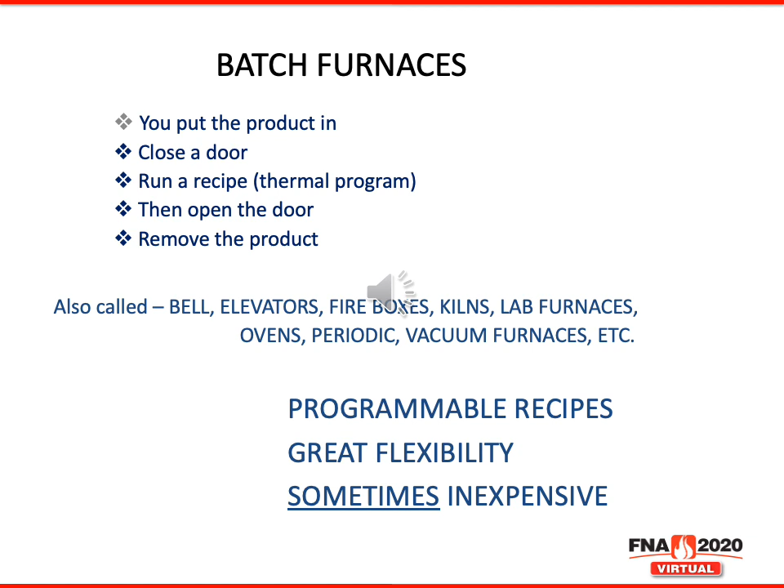On the other hand, continuous furnaces are a bit different. You continually load the product into the furnace. It usually goes on a belt, or sometimes a pusher. It goes into a tunnel and persistently comes out the other end. And when I say persistently, that means if you're not there, it's still going to come out the other end. They have a number of different names, conveyors, belts, lehrs - it all depends upon the industry involved. Even things like glass tanks and steel furnaces, you put product in, it melts, and it comes out as liquid.

They have programmable recipes, but limited flexibility, and sometimes they're relatively expensive. But within range, you can actually have some flexibility in continuous furnaces, just not as large a range as you would have running a batch furnace.

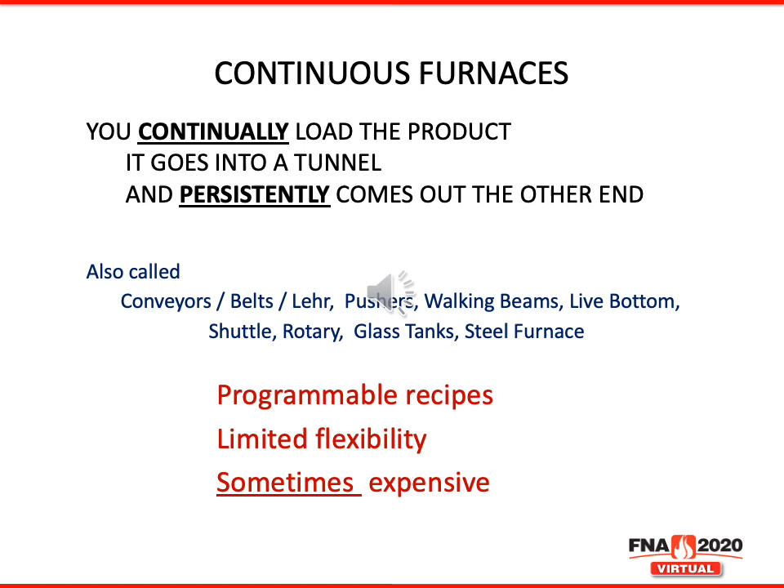So the question really arises, when does it make sense to go to a continuous furnace? Both can be designed for various atmospheres like hydrogen, nitrogen, air, argon, forming gas, vacuum, and mixtures. Batch furnaces are very good for long thermal cycles. Like I said, they have high flexibility in that thermal cycle, not necessarily in the atmospheres, although sometimes they can.

Continuous furnaces are best for stable, well-designed, understood processes. They have high productivity or high volume, and they're really good for repeatable thermal cycles. When you run a batch furnace, you're not always 100% sure it followed the same recipe each time.

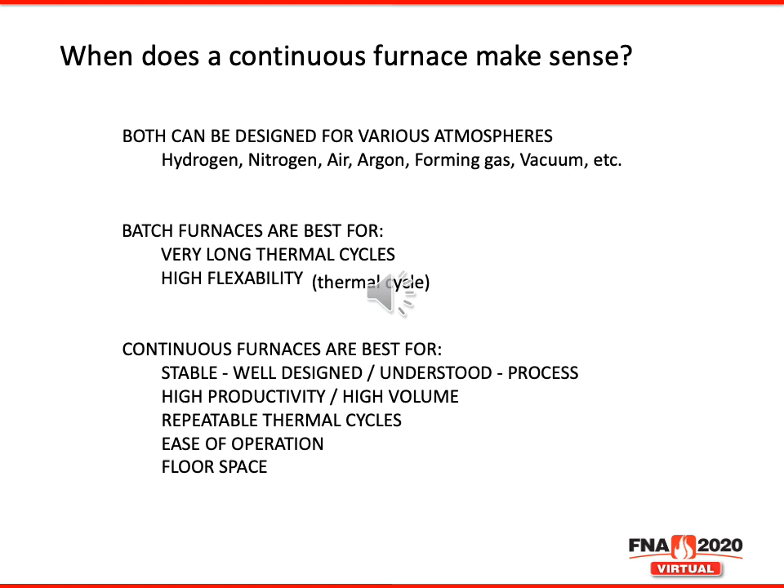Continuous furnaces have ease of operation because they're running and you just put product in there. And there are times when you have high volumes that floor space is really less when using a continuous furnace.

So the next question is, what do you need to know before purchasing a continuous furnace? Obviously the thermal profile or the process window, and maybe both. You need to know peak temperature, the hold times, the ramp rates up and down, intermediate hold times, and time over intermediate temperature. The atmosphere is important because it makes a difference as to how the furnace is designed.

Air, hydrogen, nitrogen, mixtures of hydrogen and nitrogen. In some cases, it's important to know the dew point in the furnace and even the oxygen levels, especially if you're running nitrogen or hydrogen.

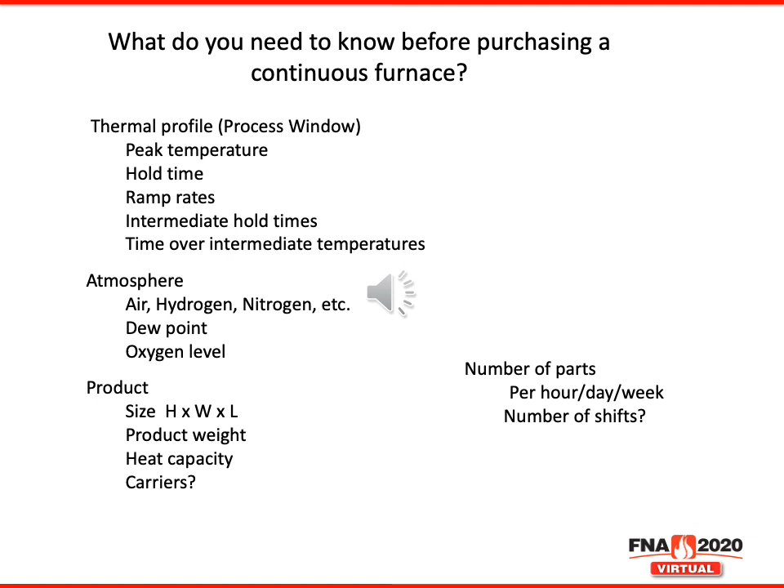You need to know the product size - the height, the width, and the length - the weight, the heat capacity, or is it even put in carriers of some sort. It's also important to know the throughput you need in that furnace - a number of parts per hour, per day, per week, or how many shifts it's on.

So let's focus on continuous furnaces. There are a number of subgroups in continuous furnaces - things like walking beams, pushers, and belt furnaces. Even within that group, it's important to understand that there are differences in furnaces designed to run in air, explosive gas, or even non-explosive gas. Those are very critical things to know.

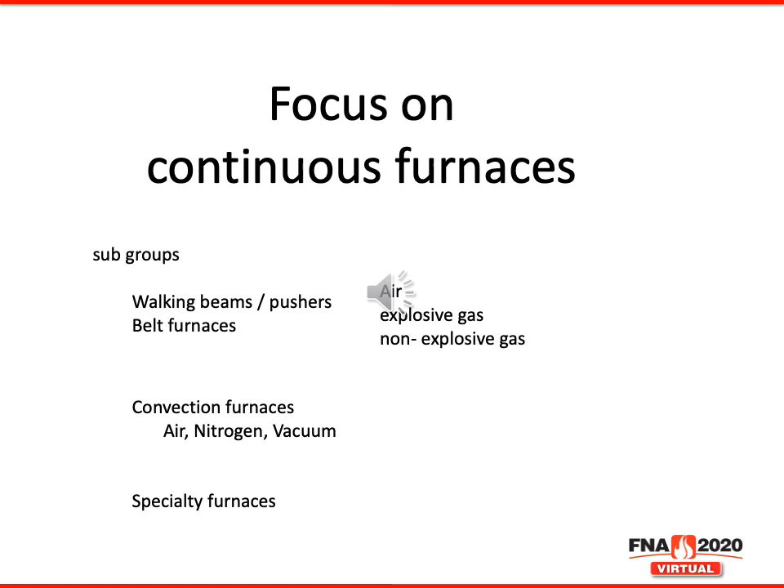In convection furnaces, it can be air, nitrogen, even vacuum. In vacuum, we'll talk a bit more about that later. And then obviously there are the specialty furnaces for very, very special processes.

Okay, we're going to talk about the individual types of furnaces now. We're going to start with the big boys - those are the walking beam furnaces. They have very high throughput, high weight can go through those, very high temperatures. They can be hydrogen and nitrogen mostly. Once in a while you see a walking beam in air, but those are the big boys of continuous furnaces.

There are also pushers, which run a little lower in temperature, around 1800 degrees C, and the weight limit is slightly less. Walking beam uses a reciprocating beam that lifts and moves product forward. Pushers have a train going through the furnace, with the pusher pushing pallet against pallet. The big problem with pushers is at very high weight they become hard to push, and if the pallets aren't maintained well, you can get a crash where things buckle up, which isn't good. But usually pushers are designed so you don't run into those issues.

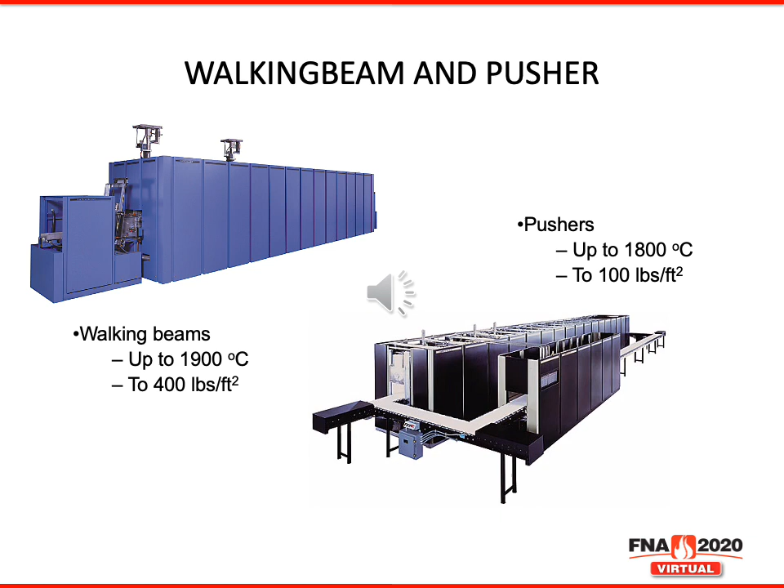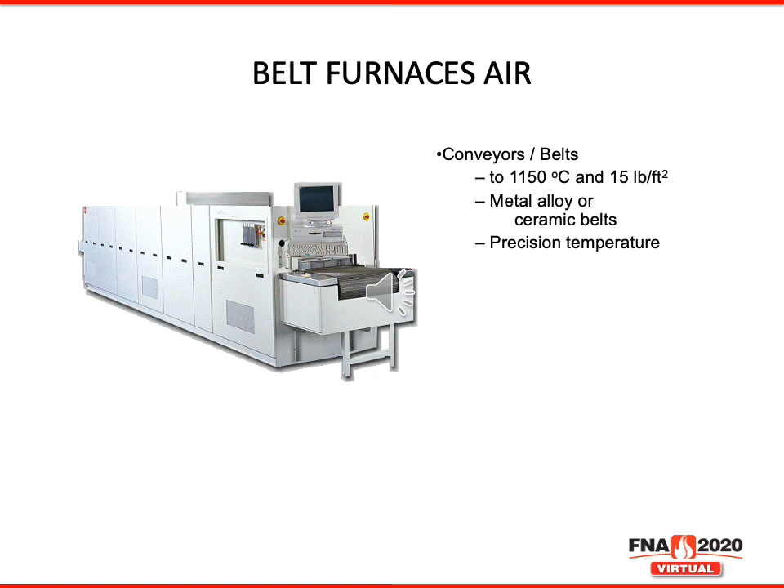The next furnace we'll talk about is the belt furnace, specifically in air. These are called conveyor or belt furnaces. They have a maximum temperature of about 1150 degrees C, and the weight limit, because of the belt, is around 15 pounds per square foot. They use metal alloy or ceramic belts, though most people use metal alloy. Ceramics tend to be a little brittle, but the good thing is they offer precision temperature control. That's the air furnace.

Next are the belt furnaces using non-explosive gas. These differ from the air furnace because they generally have a metal muffle or a seal case to entrap the gases and keep air from getting in. They typically use argon, nitrogen, or less than 4% hydrogen, generally called forming gas, though some people use that term for higher hydrogen levels. They have atmosphere and temperature control along with dew point and O2 level monitoring. They have the same basic weight capacity as the air furnace, 15 pounds per square foot, and the same temperature capability, about 1150 degrees C.

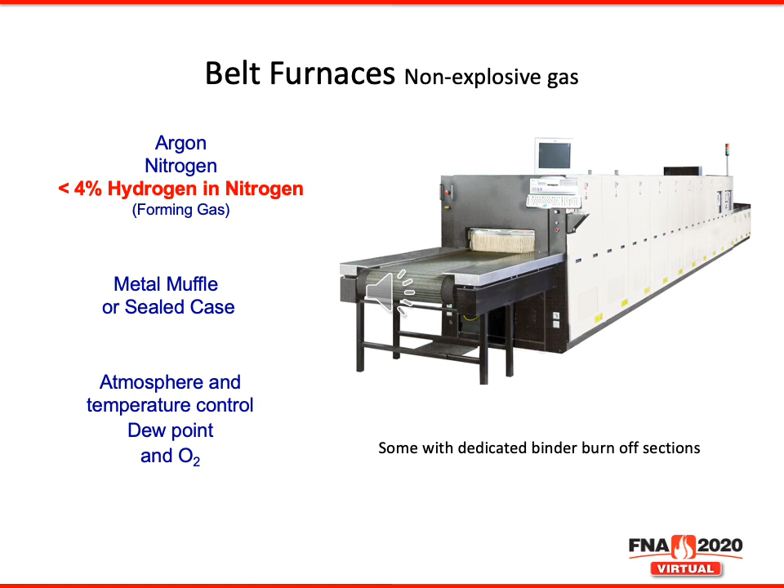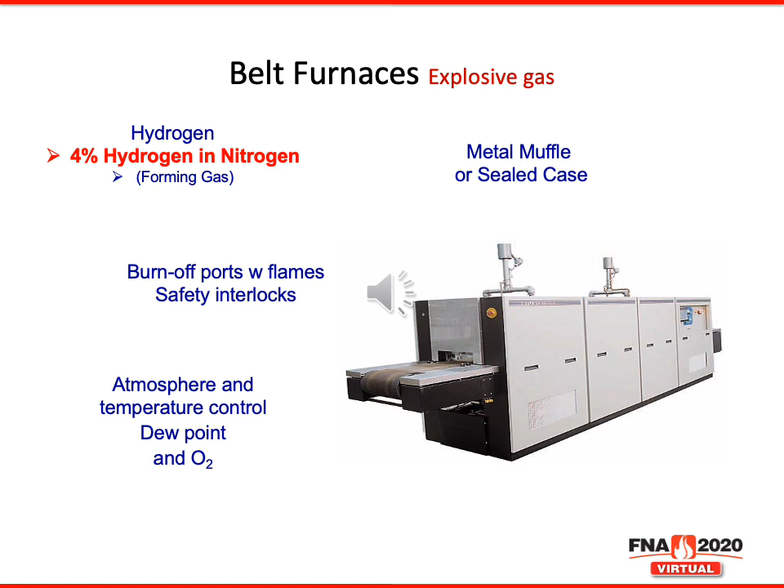The next belt furnace type is explosive gas. These are the fun machines, the ones that do an awful lot of work. Because of the explosive gas, they need special burn-off stacks so we don't have explosions, since hydrogen mixed with air doesn't do very well. They have burn-off ports with flames and safety interlocks so the machine runs safely. This is typically hydrogen greater than 4%. Going back to forming gas, I've had people say they use forming gas only to find they're at 15 or 20% hydrogen, meaning they really need an explosive gas furnace with full safety interlocks. Again, these have metal muffles; sometimes sealed cases are used, but we're not very comfortable with sealed cases here. We much prefer metal muffles for this work. They again have atmosphere and temperature control, dew point, and sometimes O2 control, for when someone needs very low oxygen levels, down to 1 or 2 parts per million. You can achieve that in these furnaces quite easily.

The next type are convection furnaces. They can run with either air or nitrogen, basically heating with hot gas. It's like a convection oven at home, except it has a belt running through it, and it tends to run a bit warmer. They go up to about 400 degrees C as the general peak temperature, though a few run as high as 425. They're used mainly for solder reflow or epoxy curing, which happens around 100 degrees C. They have multiple heating zones, usually with top and bottom heat and an internal cooler. They're really a workhorse for that lower temperature range, and convection works significantly better than radiation when you need precision control at those lower temperatures.

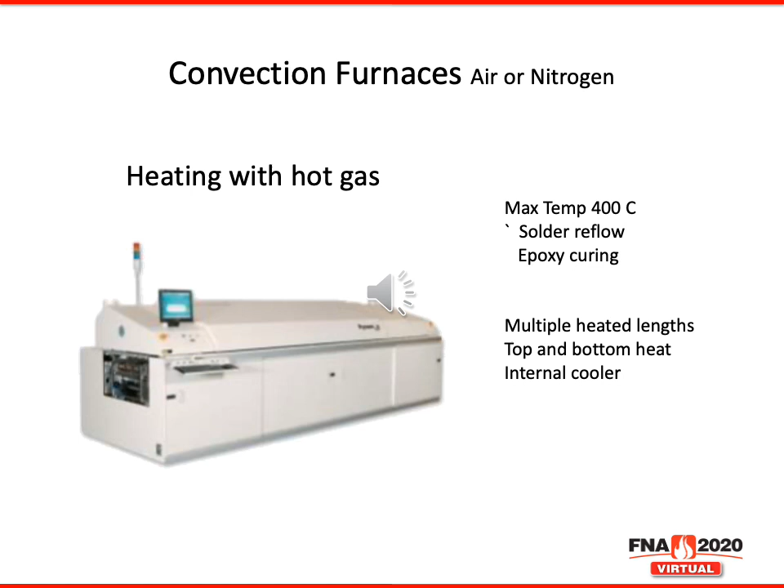This is a typical convection reflow oven. The top one is nitrogen, the bottom one is air. It's easier to explain with animation, but we'll try here. Looking at the top oven, the nitrogen oven, you'll see the entrance has a lip vent exhaust in the curtain area. The curtain isolates the room atmosphere from the nitrogen atmosphere inside. At the exit, you have basically the same setup, a curtain and a lip vent exhaust.

Nitrogen ovens have heating zones and cooling zones, and usually a flux management system. What you want to be able to do is pull any of the flux that may be in the oven's atmosphere, take it out, scrub it out, and then return that clean nitrogen to the oven itself.

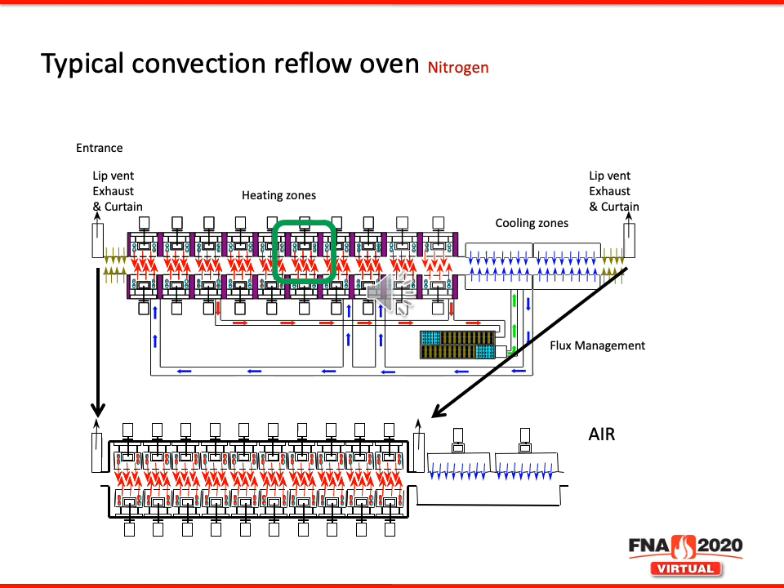On an air oven, you don't care about returning the air to the oven. What you basically do is eliminate the curtain at the front. We put a lip vent, the exhaust right at the front edge, without the curtain. On the exit, we move the lip vent to between the heated zones and the cooler, because we want to stop any of the flux from moving down into the cooler and condensing there. You'll see on the nitrogen oven I have a green square around that area - we're going to talk about what one of those plenums really looks like.

Okay, so this is a typical reflow oven heated zone. The top plenum - there's actually one on the bottom that does exactly the same thing - pushes the heat into it. If this was done with animation, it would be a bit easier to point to the individual items.

Let's start at the top left with the nitrogen inlet. Across the top, you see the blower motor. If we drop down a little bit, you see the blower motor drives this blower wheel, and that's what develops the pressure in the chamber. The blower wheel is like a scroll fan - it kind of looks like something you'd put a chipmunk in and have them run around, but it's a lot faster than that. What happens is that scroll fan spins, it pushes the gas across the heater to heat the gas and develops the pressure in the chamber.

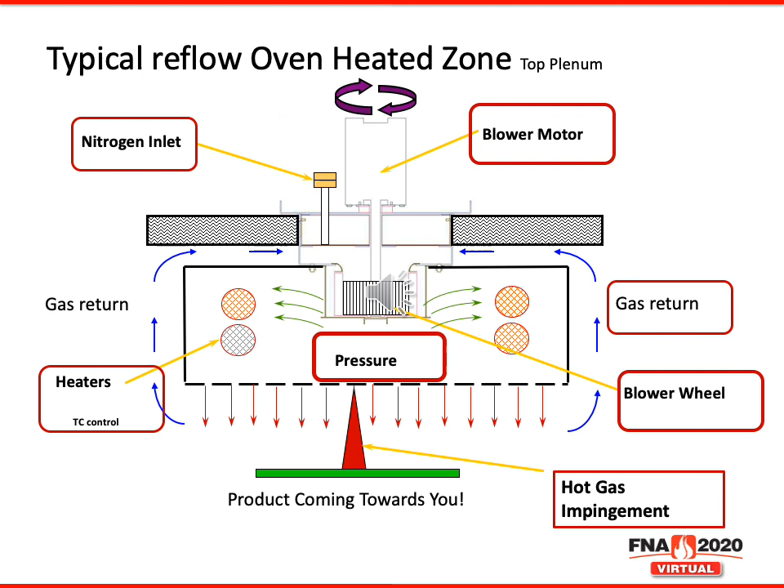What the pressure then does is go through small orifice holes, and it pushes that hot gas impingement down onto the board itself. Then there's a gas return that goes back up the side, so you don't have to reheat the gas each time. This is basically the top plenum from a reflow oven.

I mentioned earlier that we're going to talk about some continuous ovens that actually had vacuum in them. There is a convection oven with inline vacuum. This isn't really brand new - inline vacuum ovens have been around.

When I worked in the automotive industry, we actually used continuous vacuum furnaces to flash aluminum on the insides of the reflectors used in automotive headlighting, although those were very complicated machines and didn't quite reach the kind of temperatures we're talking about here. In that industry, we just wanted to pull a vacuum and then flash aluminum to get it onto the surface.

The reason we're doing inline vacuum on convection ovens is that for some components being put under hood in automotive areas, military, and some medical devices, they want to put more power into those. Part of that is being able to get the heat out of the chip, which means thermal pads have to be without voids. That's really what this is about.

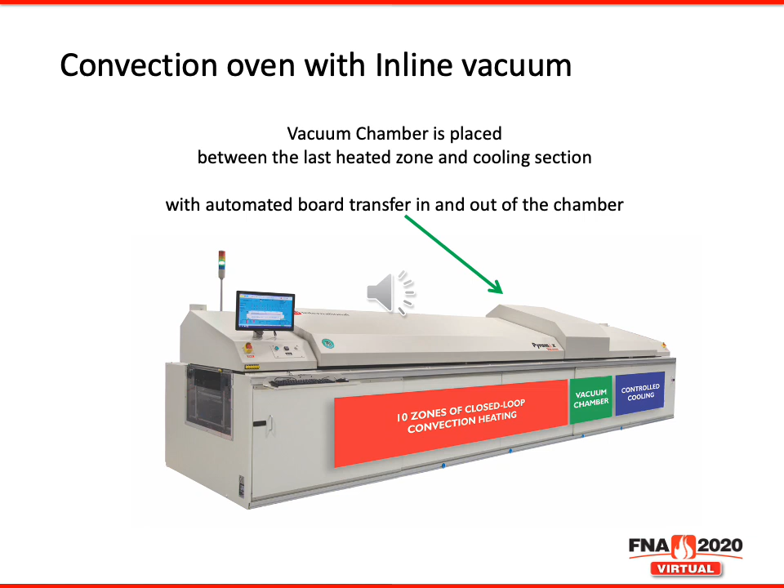Vacuum levels - you can get down to about 1 torr with that. Basically, what they do is take a standard reflow oven - mostly nitrogen - and place a vacuum chamber between the last heated zone and the cooling zone. Then you have an automated transfer in and out. So it does interrupt the process during that cycle, but it seems to be working very, very well.

This is a typical part of the vacuum process that we see. I pulled one of these out just to explain what happens in the vacuum chamber. You basically have a pump down, and the rate at which it pumps down is critical - if you go down too fast, you get splatter of the solder and chips that actually turn over. You go down to the vacuum level, the torr level that we get - this one, I think, was down at about 20 torr.

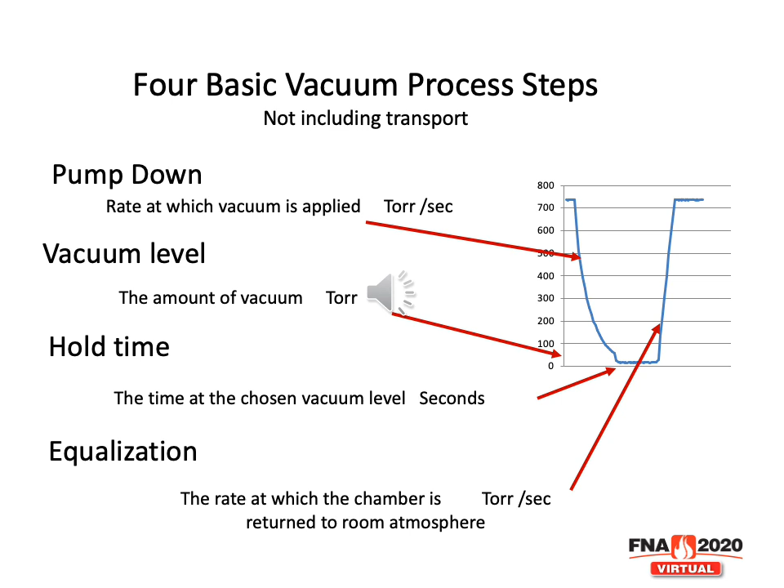Then there's hold time - a number of seconds - and then a refill, the return to room atmosphere. So that's really what goes on. The total time for that in the vacuum chamber might be 30 or 40 seconds at the most.

I mentioned specialty furnaces. There are a number designed for different kinds of applications. There's live bottoms, which look like a flatbed rail car that travels through a hot tunnel. They're basically air, and can handle thousands of pounds. They have very long thermocouples, and I think mainly they're used in the brick industry. There are rotary furnaces, rotating tube furnaces, where products like sand travel through a tube at an angle, and you control the throughput by controlling the angle and rotational speed. Then there's glass tanks and steel furnaces that handle molten materials. I'm not going to cover much more about those, but they are continuous furnaces.

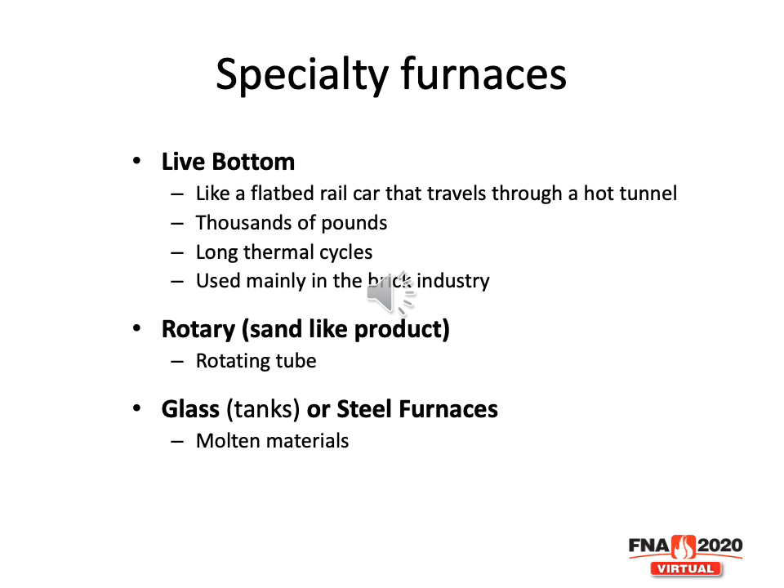Okay, so we'll talk about how we get things hot, heating technology. Basically there are two methods, though a few others exist too, but I'm going to talk about the two major ones. One is gas or flame, the other is electric. I'm not super familiar with flame heating, but I'm very familiar with electric heating. There are people who specialize just in flames, adjusting and controlling them, so I'm going to talk about the electric side.

There's obviously convection heating, like we mentioned before with the reflow ovens. There's things like moly disilicide and silicon carbide rods. There's refractory metal rods, mesh, wire, and ribbon - things like moly and tungsten. And then there's fully enclosed ceramic heaters, called FEC. Most of the stuff we use is the fully enclosed heater because it protects the heater's surface, and they tend to work quite well for us.

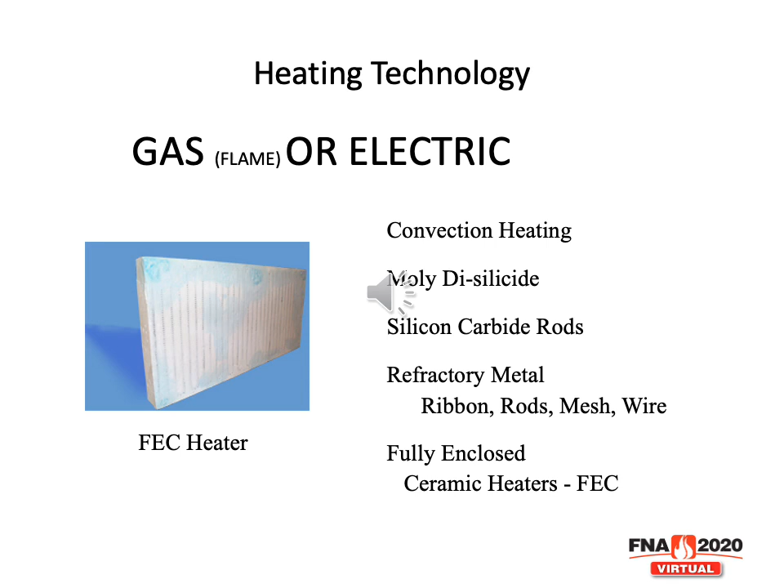Insulation in furnaces can be things like brick, high-performance board, fiber blanket. Some of the things you can use are heat shields, called cold wall - usually moly or tungsten, and even graphite and carbon. The issue is when you get to graphite and carbon, you have to make sure the O2 levels are very low, otherwise they just disintegrate.

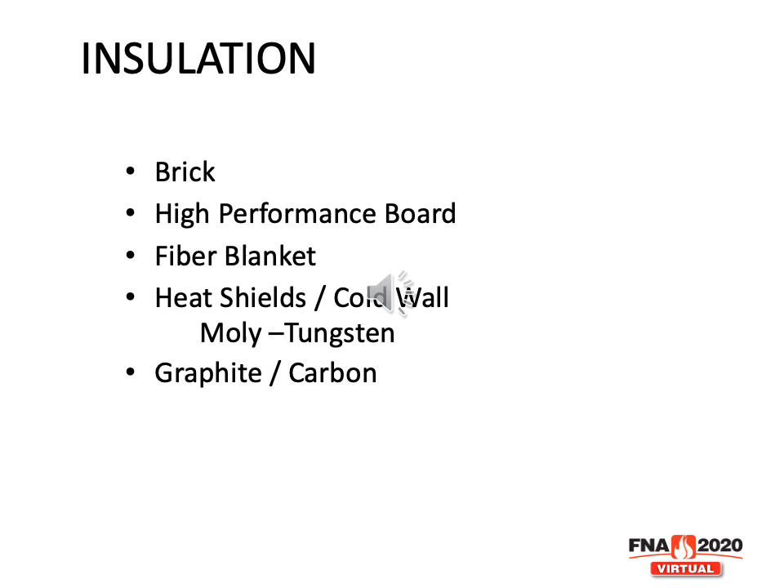There's technology to separate the internal atmosphere of the furnace from the room - things like purge boxes. I didn't quite have the ability to pull a picture of one of those; this COVID thing has limited my ability to pull some pictures. We have things like gas curtains - this is the gas curtain in the belt furnace. Basically the same philosophy applies with convection ovens. On some hydrogen furnaces, you'll actually have flame curtains - we're burning the hydrogen at the end, which helps stop air and oxygen from moving into the furnace. Instead of having stacks and gas curtains at the ends like I showed earlier, these use a flame curtain at the front of the furnace.

The next topic is technology to separate the furnace atmosphere from the room - things like purge boxes, or sometimes called double door airlocks. Unfortunately I wasn't able to get pictures of this because of COVID. Really, calling them airlock boxes isn't quite correct - you might call them atmosphere exchange boxes. They work somewhat like clean room pass-through boxes. We fill a box with hydrogen and nitrogen before opening the internal door to the furnace, so you're not putting air within that furnace. There are gas curtains for separation from outside to inside, and they usually have stacks of some sort within the furnace to help control airflow, like with the Venturi I mentioned earlier - used for binder removal and hydrogen burn-off stacks. Some hydrogen furnaces use flame curtains that act as a barrier to stop oxygen from entering the furnace and hydrogen from getting into the room.

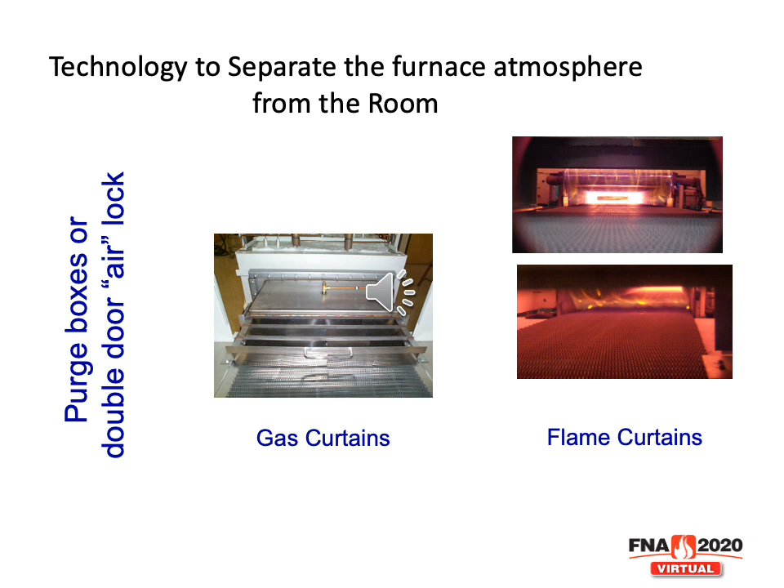You can also design into the furnaces things like heat barriers and shadow walls to help with rapid changes in process temperature. This is basically a heat barrier. You can see it's kind of hard to see in these pictures, but this is a barrier that can drop down to give you a little bit of isolation. It helps you have more rapid changes in process temperature, with less crosstalk between the zones.

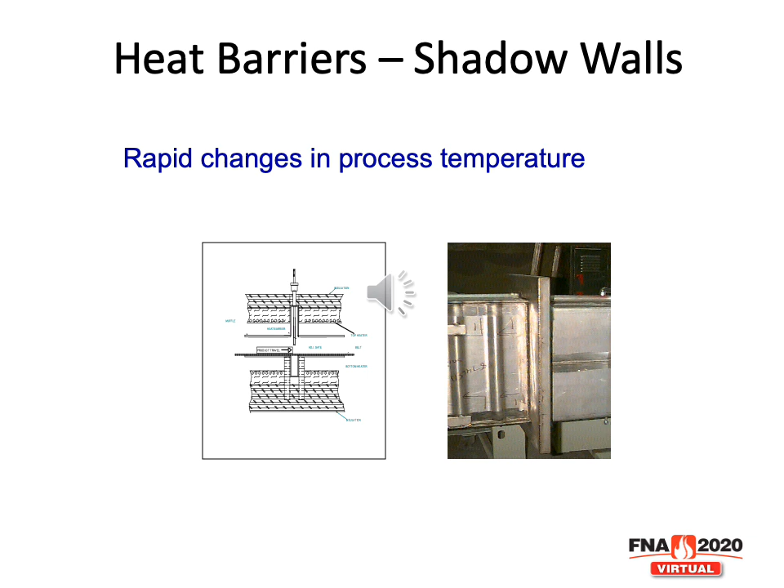Another tool that we have is gas barriers. They allow us to isolate or even exclude gases from certain areas of the oven. They have the ability to get very, very low ppm capability to drive the oxygen level way down, and a very high purity hydrogen atmosphere in some furnaces, and you need the controlled exhaust to make these work.

We have a furnace that actually has nitrogen curtains on the end and hydrogen in the center, and we're able to approach 96% hydrogen in the middle of the furnace. Some processes that's very important for. Others, you're happy enough to get into the 65 or 70 or maybe even 80% hydrogen in the oven. But there are some that require that very, very high purity hydrogen, again up into the 96% area.

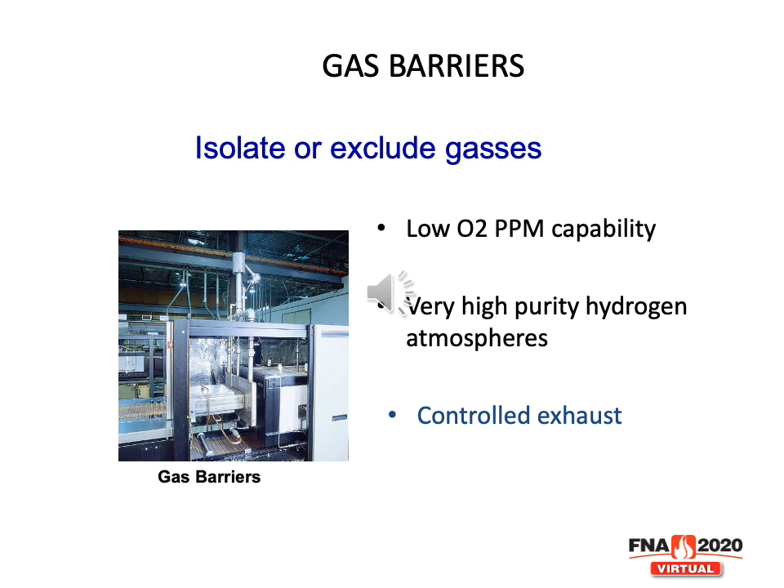We use a principle sometimes called Venturi, or Venturi exhaust, to help remove gas from the furnace and control the direction gas goes in the furnace. They sometimes have removable stacks. Sometimes we actually put sparges in, which add gas that can be heated or non-heated, and this is to help control the O2 levels in the furnace.

And sometimes you need to pull a binder out, for example in an area you don't want to contaminate the furnace, so you put one of these in. We actually had a furnace at one point in time, easy for us to put another one together, that was used for copper end termination, where we needed to run maybe 10 or 15 ppm of oxygen for the binder burnout section. We used a lot of sparges and added some gas in there to keep that mixed up. Then, following just after that, we did it with gas barriers, but we were able to run down to less than 2 parts per million during the sintering section when we actually raised the temperature. That was a very unique machine. It was a lot of fun to run.

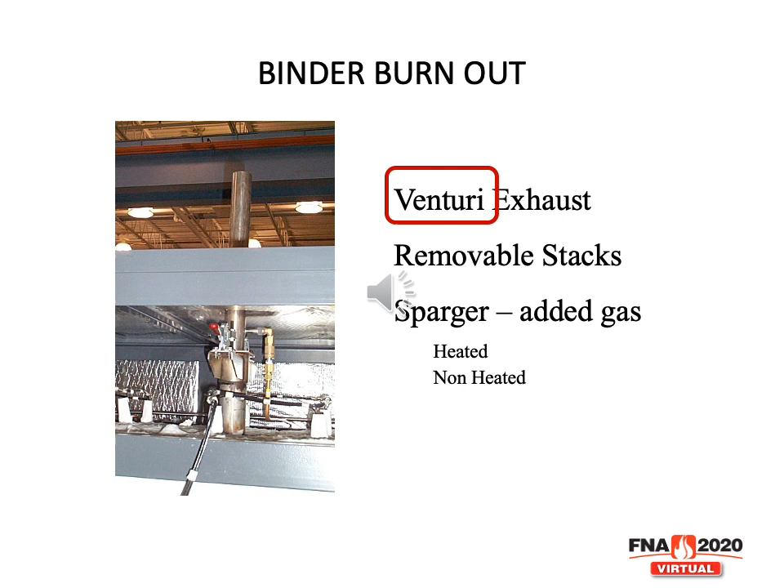We have a quick discussion on the Venturi operating principle. I think most people are aware of that. You put high velocity gas through a very small orifice, and it entraps and pulls a lot of gas along with it. It was developed by a guy named Giovanni Venturi, and that's where you get about 8 to 15 times the input. So if you put 2 liters per minute through the Venturi tube, you can pull anywhere from 8 to 15 times the amount of gas through that tube.

And we use that fairly often to control which direction we want gas to flow, because generally what you want to do is make sure you have the cleanest gas at the highest temperature within the furnace, because that's where you're doing the major amount of work.

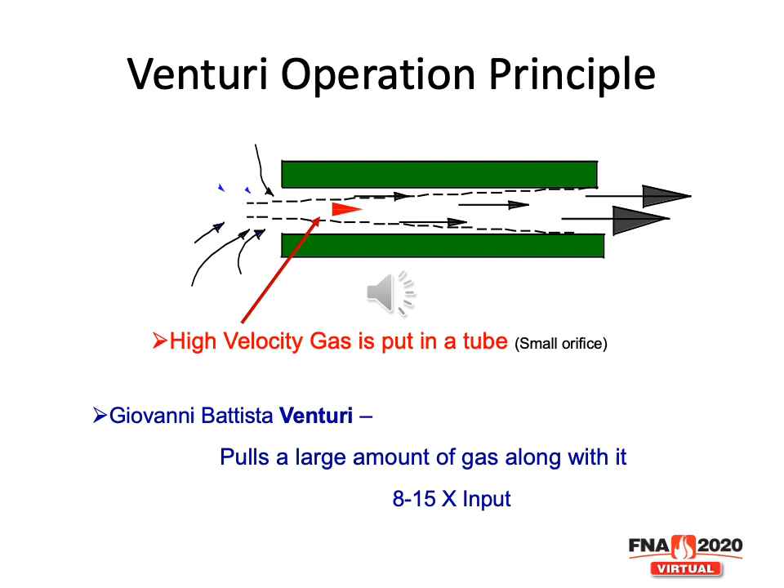In many cases, it means that people can fit the furnace in their building, and still get things that are cool coming out of the end of the furnace.

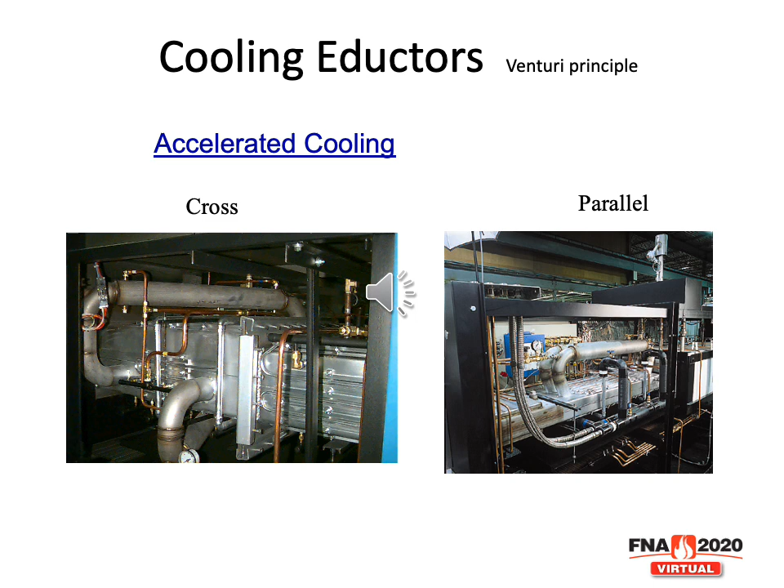Another place we can use the Venturi principle is in cooling eductors, for accelerated cooling. We pass gas through a small orifice inside a tube, and the outside of that tube has a water jacket that cools the gas and returns it to the furnace. We can do this in cross eductors or parallel eductors, both work depending on the particular product and what we're trying to achieve. This accelerated cooling allows us to shorten the cooling section of the furnace, which in turn allows people to fit it in a building they might otherwise not fit it in.

So we go back to the question: when should I get a belt furnace? Now we know what options can be put on it, and there are other options I didn't discuss. It's an economic issue. It's when you have higher volume and a need for process repeatability, and you really need to be able to clearly describe the process so the features we've talked about can be put in the correct places in the furnace. It doesn't do any good if you want a smooth, easy ramp rate and you suddenly put a gas curtain in place - it doesn't always work, unless you want to turn the gas curtain off. But you really need to be able to describe the process so the features can be put in the right place in the furnace.

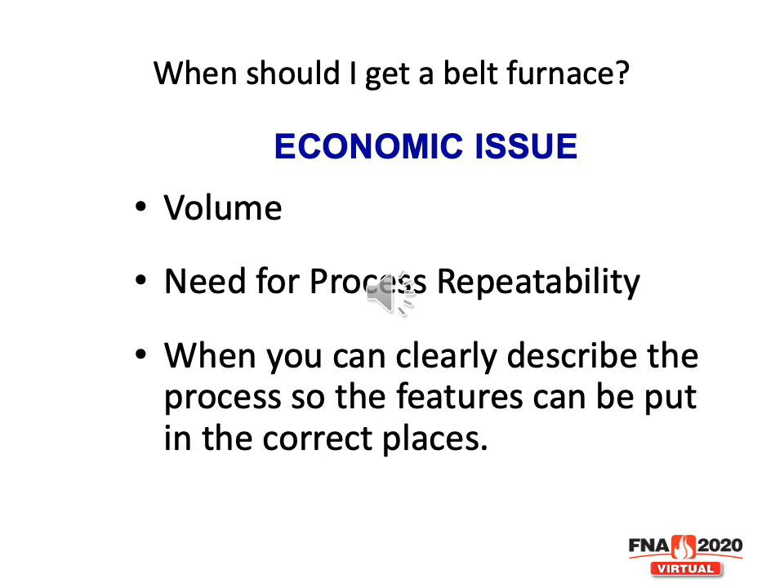One of the questions that comes up on a regular basis when talking about continuous furnaces is: how do you set it up for, or do verification of, thermal profiling? To do that correctly, you really need to measure the temperature of the part as it goes through the process.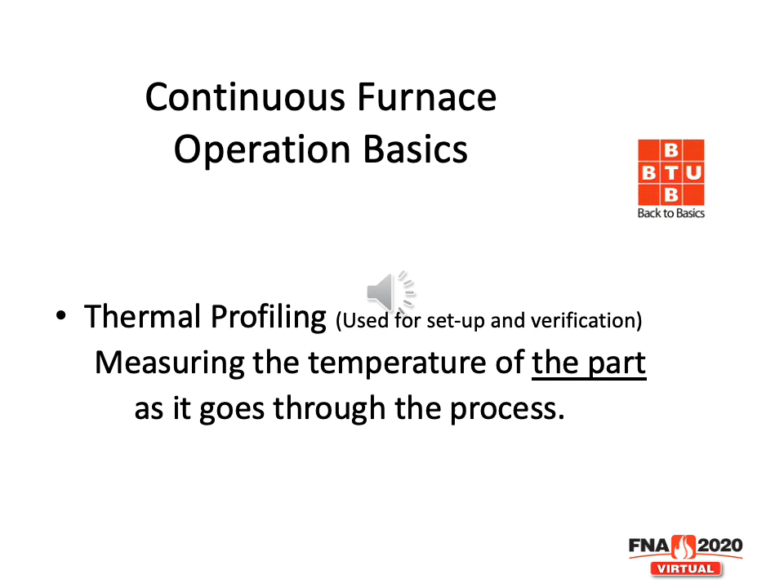So the question really comes down to, how do you get these product profiles? There's low temperature and high temperature profiling, but in both cases they require a temperature sensor and a data acquisition device - really, a thermocouple and a thermal process profiler. So the question becomes, how do you obtain these product profiles? There's a slight difference between low temperature and high temperature profiling, but they both require a temperature sensor and a data acquisition device - that's a thermocouple and a thermal process profiler.

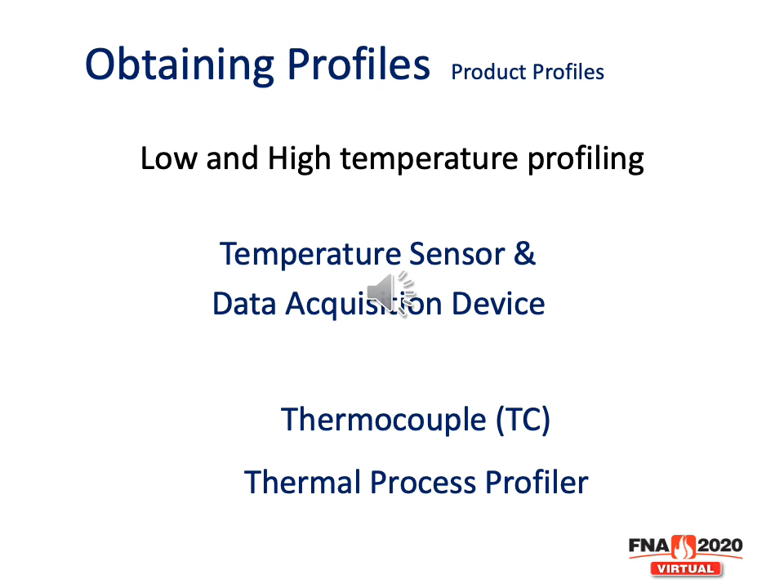So we talked about thermocouples, or that temperature sensor. The question people ask is, what is a thermocouple, what does it really do? Well, this guy named Tom Seebeck, years ago in 1821, discovered that when two dissimilar metals were joined together, they produce a voltage, like a little battery. The properties of that voltage useful to us as process people are that it varies with temperature and it's repeatable.

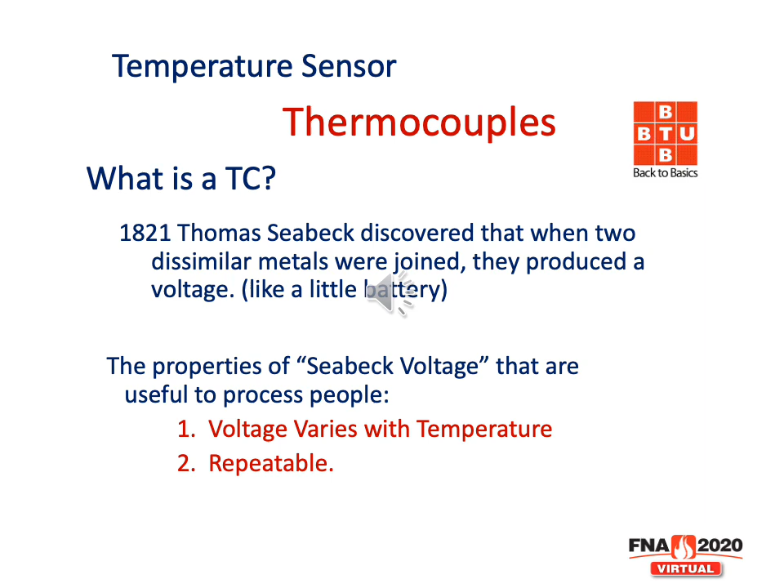The American National Standards Institute has established designations and published voltage tables with different combinations of metals, designating those metals as types like T, J, E, K, R, S, B. There are others that are universally used but don't have official status, such as Platinel and Type N.

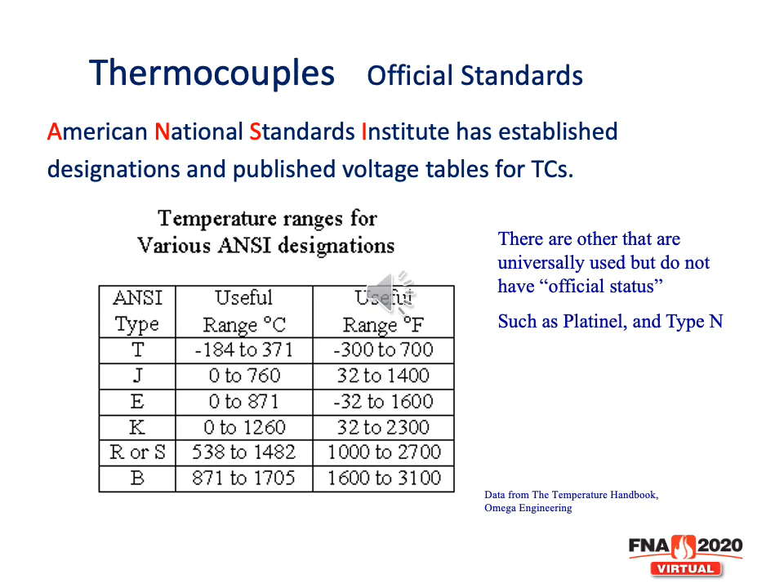Things get a little complicated as we start talking about what thermocouples are and which ones we're going to get. There are two different grades of thermocouple wire: one is standard limits and the other is special limits. Basically, the accuracy of a special limit thermocouple is twice as accurate as a standard limit one. We tend to use type K thermocouples in the surface mount industry. If we're going to high temperatures, we tend to use things like type R. But type K is relatively inexpensive.

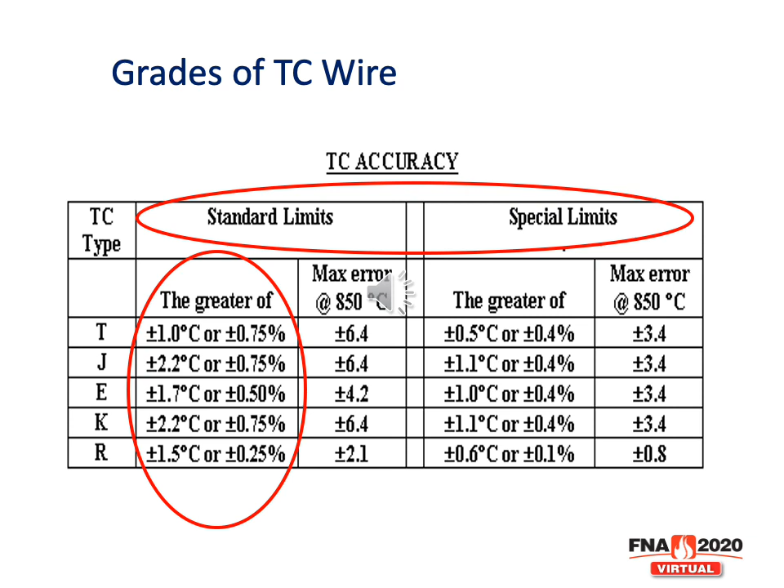But the whole issue is you need to be able to manage that error you see. For example, with type K, the standard limits are plus or minus 2.2 degrees, or 0.75% of the reading. If we get up to 850 degrees, you can only be accurate within about 6.5 degrees. It's half of that if you go to special limits. If you make a chart showing the error - we call it the error cone - you can see what happens with type K. Below 300 degrees C, the error is about plus or minus 2.2, or for special limits, 1.1. But above 300 degrees C, the error cones begin to open up.

So that's why you see at 850 degrees C, the plus or minus 6.4. Now that's lot-to-lot differences, not variation within a lot, and that's something to be well aware of.

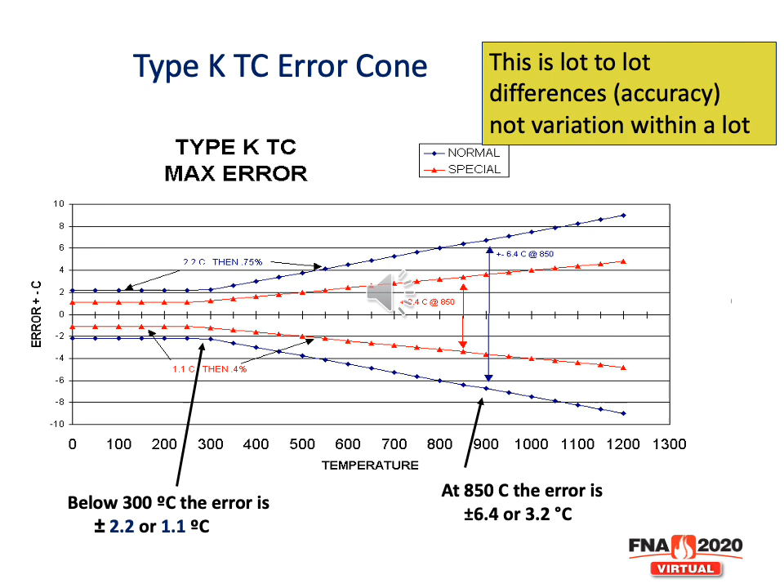On the last slide, I mentioned something about accuracy. That means we really need to talk about repeatability and accuracy. Repeatability is the ability to hit the same place each time. Accuracy is the ability to hit the target.

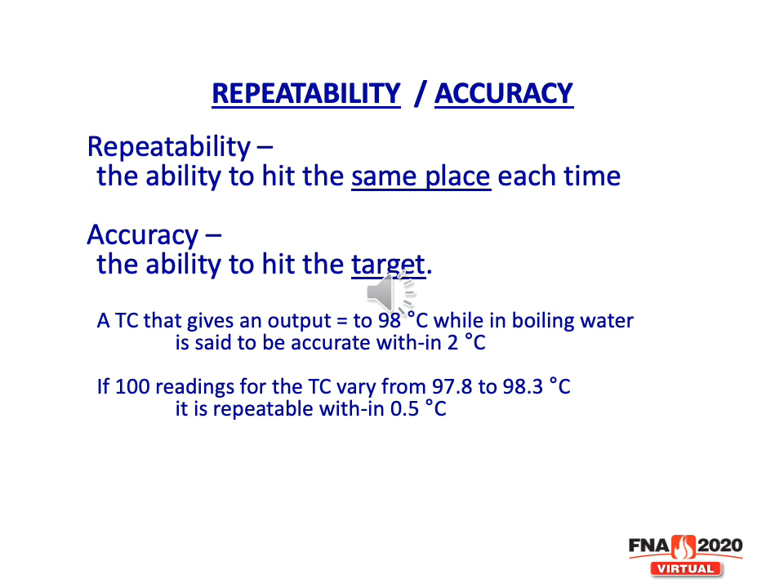A TC, for example, gives an output of 98 degrees C while in boiling water, which really should be 100 C, is said to be accurate within 2 degrees. If 100 readings for that TC vary from like 97.8 to 98.3, it's repeatable within a half a degree. Repeatability and accuracy are slightly different.

But there is a road to get to accuracy. To get accuracy, what we need to use is certified TCs. They have an additional cost, usually $75 to $100 for the first temperature and $25 to $30 for each additional point. A lot depends upon where you get them from. The certification documents the offset at the measured temperature, but it really doesn't address repeatability.

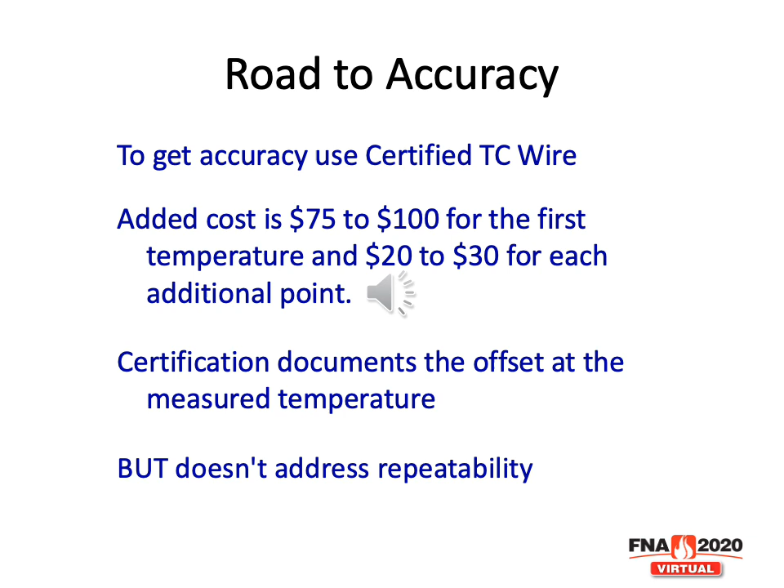Another issue you can run into is thermocouple aging, and this is with type K thermocouples. We were running a project where we were attempting to get plus or minus 1 degree C across the 25-inch wide belt through the peak temperature. We were having some issues, so we finally took brand new thermocouples, 6 of them, and ran them down to see the difference, all next to each other, very close to each other.

We found that they were within about 0.5 degrees C of each other on run number 1. Then what we did is held one back, the number 1 TC, the control one, and ran the other 5 of them down through the furnace on multiple runs. After we got done with that, we said, let's see how much they may have moved from the number 1 TC. So we put them all back together again on run number 10. What we found is those 5 thermocouples were now 2.5 degrees C apart, and they had moved 3.5 degrees C from the original TC.

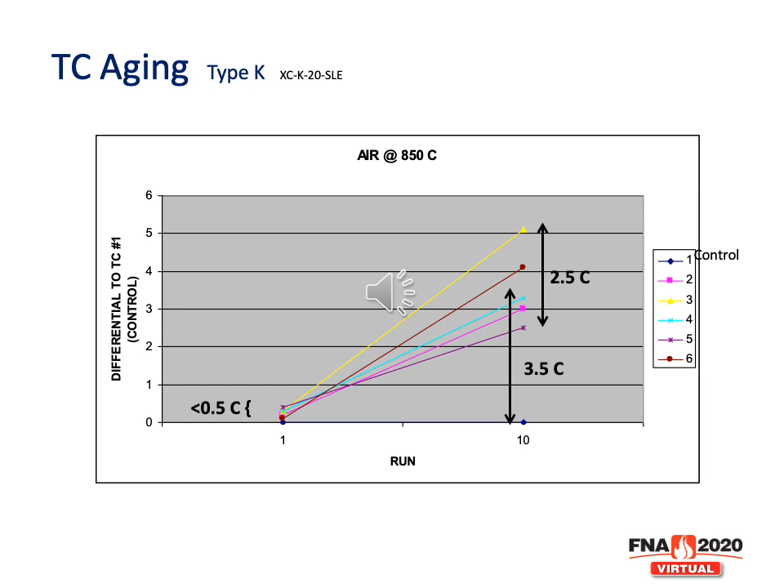So that's an issue you can have with repeatability. Now this happened in air. Later, we ran some more studies of the type K TCs down at about 225 degrees C. We saw very little change at that temperature. And then we also ran them in hydrogen up at 850 degrees C, and we didn't see very much change at all in hydrogen. So this really had to be an oxidation of those thermocouple joints.

So far, we've talked about the thermocouples, but what about these thermal process profilers, or data acquisition devices? Well, I remember previously I talked about low temperature and high temperature. With low temperature profiling, generally below 350, 400 degrees C, you can put a data logger through the furnace with thermal shields, and they will not overheat the profiler. After all, you don't want to melt the solder that's in the profiler.

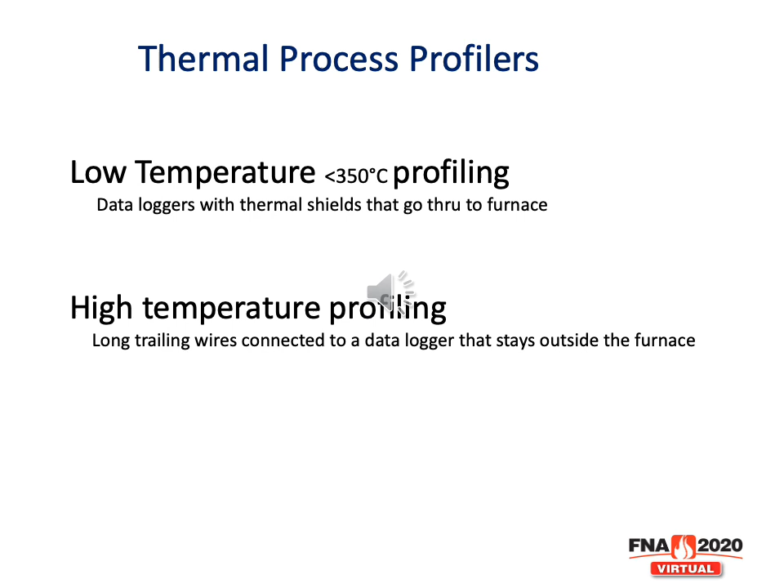Now, if it's a short cycle, yes, you can do that. If it's a long cycle, you're going to be sitting up there more than just a few minutes, and the thermal shields really won't withstand that. In high temperature profiling, what people basically do is use long trailing wires connected to a data logger that stays outside the furnace. When we were doing the studies at 850 degrees C that I just showed you, those were all trailing wire thermocouples.

So here's a quick review of what we've covered today. We talked about batch furnaces, programmable recipes, great flexibility. Sometimes they're inexpensive, and they're good for long thermal cycles. Continuous furnaces, again, programmable recipes. They aren't as flexible as a batch furnace would be. Sometimes they can be expensive. They have stable and repeatable processes, and they're good for very large volumes.

Things you need to know: it's good to know the process window, the temperature, and the process thermal cycle you need to go through. The atmosphere is important to know. Throughput, yes, absolutely, and the product size.